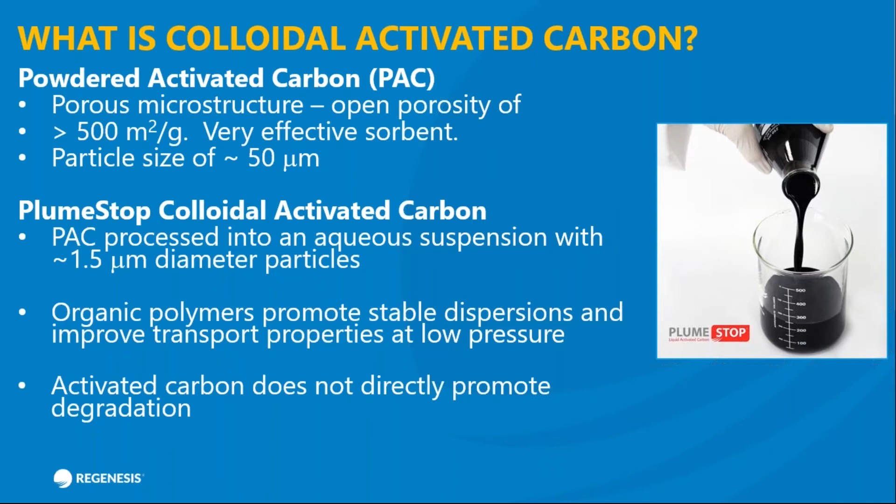So it's a great sorbent that can be placed widely in the ground, but one thing we need to realize is that activated carbon alone does not directly promote degradation.

Let's see what happens if we do a barrier in the ground with activated carbon alone. We have a model called PlumeForce, and here you can see the assumptions: seepage velocity of a couple hundred feet per year, a mixture of parents and daughters, a 7-year runtime with no degradation, no biodegradation, no abiotic degradation.

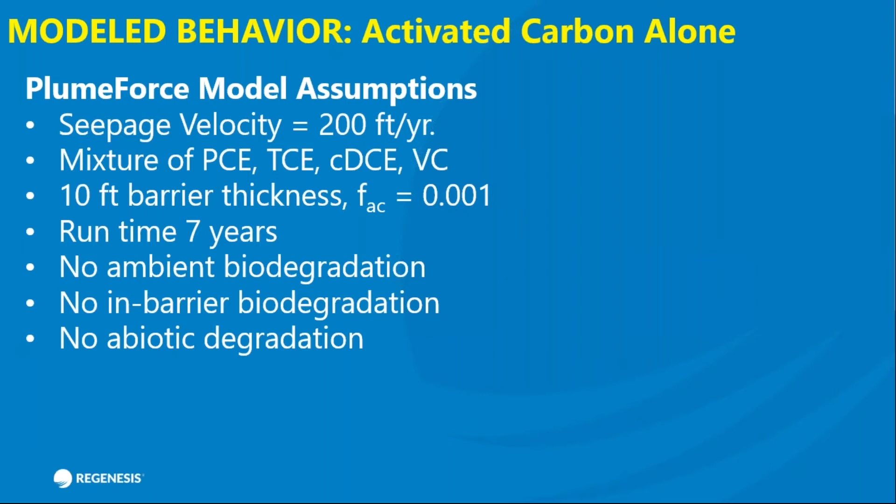Here's the plot. On the left are the incoming, or up-gradient, concentrations of the contaminants. We have about 1,000 micrograms per liter of PCE and subsequently lesser amounts of the daughters. The gray box in the middle represents our barrier. The contaminants flow with the groundwater, reach the barrier, and then emerge on the other side.

What you can see is that PCE toward the back of the barrier does get fully absorbed, and there's nothing coming out the back end, because PCE is more hydrophobic and absorbs better. So it's going to occupy all or nearly all of the activated carbon absorption sites.

But for the daughter products, there's not really enough surface area or absorption capacity on the carbon in the wall to absorb these, so they break through. The orange line is TCE, and going down you can see cis and vinyl chloride. Basically, the effluent coming out of the barrier is the same as coming in, and there are no degradation products, which in this case would be ethene or ethane.

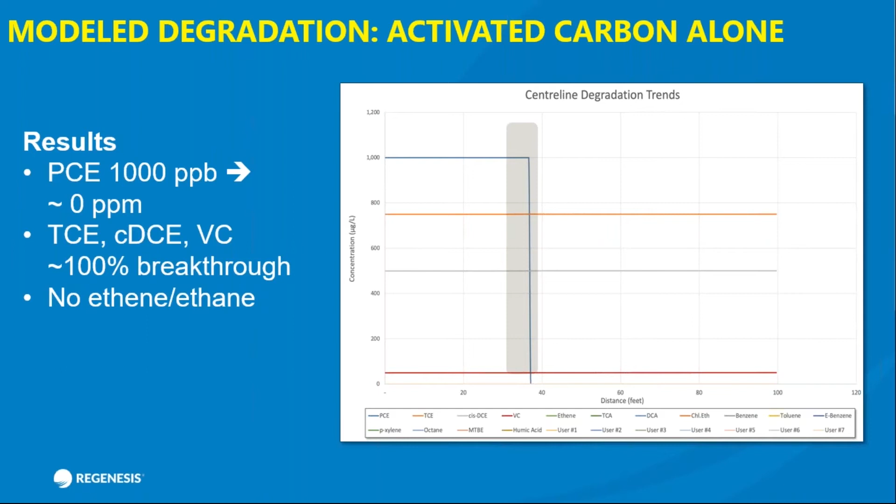So we realized that you need a combination of absorption, done by the activated carbon in PlumeStop, with a reductive degradation mechanism. There are two general classifications for accomplishing this. One is called abiotic or chemical reduction, sometimes referred to as ISCR.

There are a couple ways this can be done. One is you can use ZVI, a powerful reductant, which reacts directly with PCE and other chlorinated compounds and produces a mixture of ethene and ethane, but largely ethane. We call this direct abiotic reduction.

There are also indirect methods, which are biogeochemical. When you have native sulfate in sulfate-reducing conditions, you can form reduced iron sulfides and other reduced reactive minerals in situ that can also accomplish reduction by ISCR. Not as powerful as ZVI alone, but it does work.

The other side of the equation is biological reduction, which a lot of people are probably more familiar with. That's where you combine your contaminants, such as PCE, with molecular hydrogen produced generally by the degradation of organic compounds, nutrients, and anaerobic microbes, which could be either native or augmented, and you'll generally get the final product of ethene through daughters.

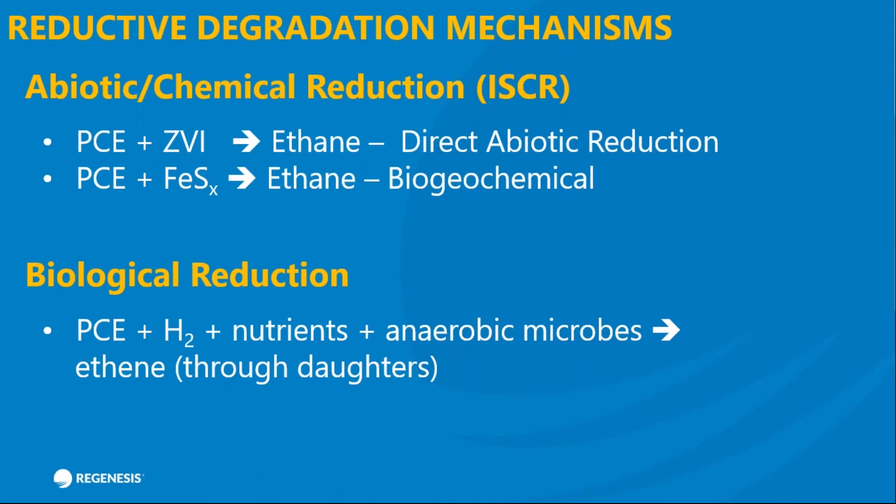So PCE will do its cascade through TCE, cis-DCE, and vinyl chloride. So what do we want to use? We have a choice of biological or abiotic degradation, and we can walk through the features of each method to give you an idea of what works best and the limitations of each.

Biological products are either water soluble, such as sodium lactate, or emulsions, such as EVO or 3-D Microemulsion, very easy to apply and you get good distribution. Basically water-like products. But one thing we need to consider is that some amendments, such as emulsified vegetable oil, can inhibit contaminant absorption onto the carbon.

There's actually a competition process between the contaminants and the vegetable oil particles, and in most cases you'll have higher concentrations of your oil. They'll preferentially absorb to your carbon, blind it, and you won't get very good performance.

The other thing about biological degradation is that it does produce daughters. So if you have a site with TCE and PCE primarily, you're almost surely going to get a cascade with the daughters. These daughters actually don't absorb as well to carbon as the fully chlorinated compounds, and it's relatively slow. In a good environment, it can happen in a time frame of months, probably would be typical.

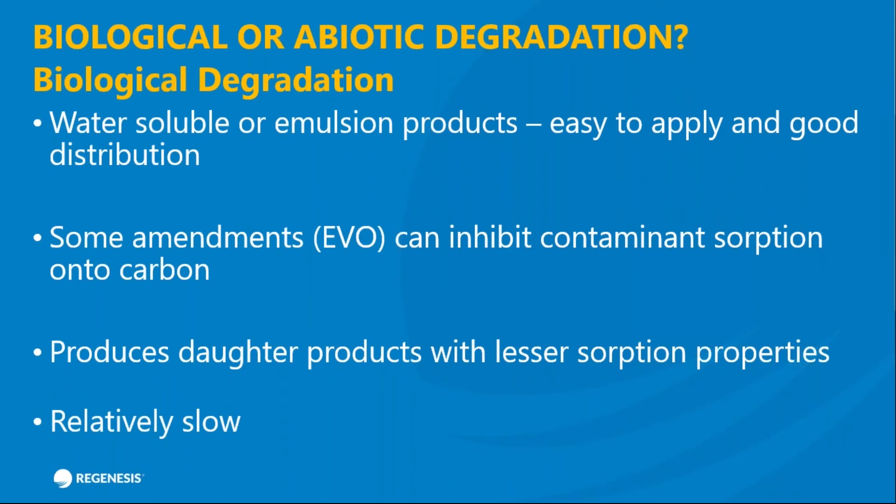Abiotic degradation with ZVI. We have a colloidal iron product here at Regenesis with a particle size about the same as colloidal carbon, so they can be applied together. Unlike the biological amendments, if you put them in the same mix tank and inject them together, generally they'll be delivered to the same place in the ground.

The thing that's really nice about ZVI is it doesn't inhibit contaminant absorption onto the carbon surfaces. You minimize daughter product formation. You don't eliminate it entirely, but typically we see 90% or so of the parents transform directly to ethene through what's called a beta elimination process. And because it's a solid phase reductant, your persistence is improved—soluble amendments such as lactate will eventually react away or be passed downstream with groundwater flow.

So let's talk about our iron product, or sulfidated iron, S-micro-ZVI. This picture on the left is an artist depiction of what these particles look like. One thing that's important to realize is that, first of all, they're small—the particle size is about 3 microns. But we engineer it. We take a particle and electrochemically deposit a reduced iron sulfide surface, FeS, which is the yellow phase on this particle, onto the surface of the core, which is iron. So it's called a core shell configuration.

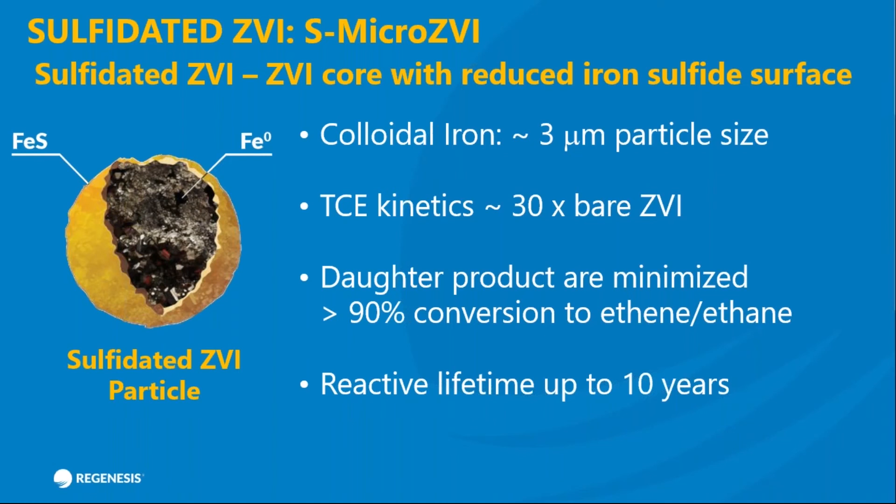There's a lot of reasons why this is better, but I'll cut to the chase. When we do tests—and it's not just us at Regenesis, this has been done at universities and other labs—you see kinetics with TCE and PCE on average probably about 30 times greater than you're going to get with bare ZVI. As is the case with other iron products, daughter products are minimized, about 90% or greater directly to ethene. And in the right environment, with the proper dosing, you can get a reactive life of many years.

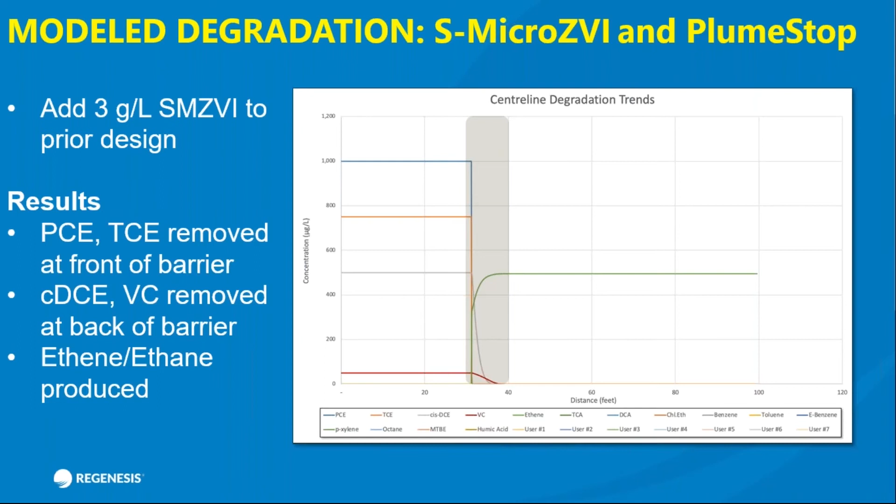So let's look at our barrier that I talked about earlier, where I showed activated carbon alone. What we've done here is, to our PlumeForce model, added 3 grams per liter per volume basis of solid SMZVI particles to the prior design, with the same flow conditions, etc. You can see the behavior is quite different. The PCE and TCE are removed at the front of the barrier, drop down to 0, and you also get removal of your daughter products. They react abiotically, and it takes a little bit longer as they pass through more of the barrier to be totally removed. By the time they reach the back, they're fully reacted or absorbed away. And unlike the other process, because we have active degradation, you can see that green line come up—we have ethene and ethane produced and generated in the down gradient part of the plume.

What I'd like to do now is actually show you some examples of where this process was used in real applications. I'm going to talk about three here. The first one is a single barrier where we had a co-injection of PlumeStop colloidal activated carbon and sulfidated colloidal zero valent iron within a barrier. On top of that—this was done a couple of years ago, so the iron technology was relatively new—we decided to be safe and add some HRC, a long release organic hydrogen produced by Regenesis, and dechlorinating microbes.

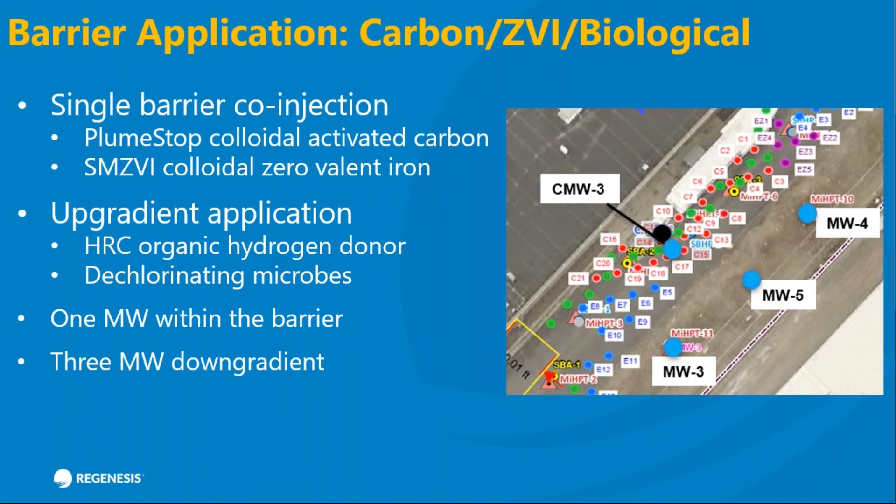These were injected slightly up gradient of the barrier that had the carbon and iron. To monitor this, we had one monitoring well within the barrier—that's the black dot there in the middle, CMW-3—and three monitoring wells 15 to 20 feet down gradient, outside the direct influence of the injection. So any effect you're going to see here is actually the effect of the contaminants being reacted away within the barrier, and you're seeing the groundwater coming through cleaner than when it went in. For your reference, the groundwater flow here is perpendicular to the barrier, from the upper left to the lower right.

So this is the response that we saw within the barrier, which is CMW-3, the black dot that was right in the middle of the injection. As you'd expect, we have direct influence here—this monitoring well had black material, which is the carbon and the iron, within the water. In the first monitoring period, we saw full elimination of all the compounds, which is not that surprising; a lot of that's probably due to adsorption. But what we like to do is look for degradation products, to look for evidence that we're actually seeing active degradation. We don't want only adsorption—we want to adsorb, then degrade, free up the surfaces of the carbon, and it's kind of a circle where you can keep the barrier working for a long time.

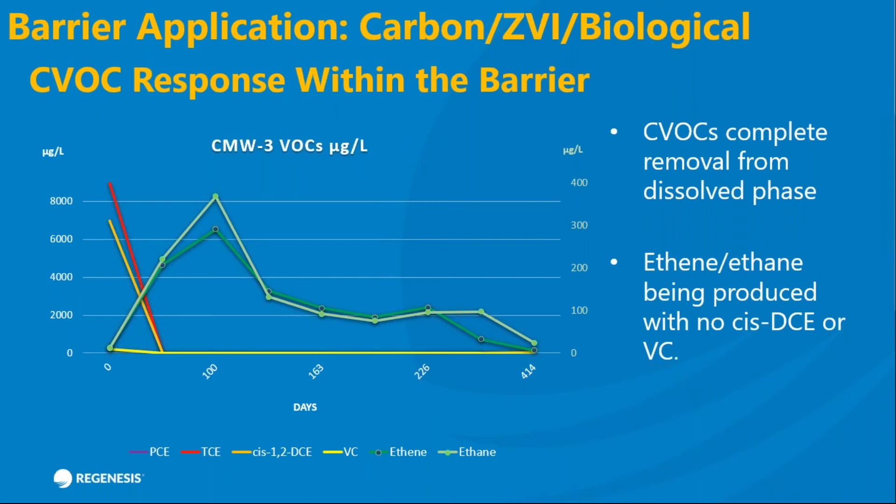The evidence that this is happening: the lighter green line is concentrations of ethane, and the darker green line is concentrations of ethene at this monitoring well. You can see this peaked about 100 days after the injection and continued on for over 400 days. This very strongly suggests that we're not just having adsorption, but active degradation within the barrier as well.

I decided to plot the downgradient barrier slightly differently. First of all, this is a log scale plot, so the concentration on the left is a log scale. What I've done here is not only plot the concentration of the contaminant at the downgradient monitoring well, but also compare it to our PlumeStop model, which assumed only biological degradation. So we plugged in how they'd behave if we only had the HRC applied and not the iron.

So we'll run through these one at a time. The red line there is TCE, and the dashed red line is the biological prediction. You can see there's pretty steady degradation after a few days. There's no TCE in the downgradient well, and the degradation process was markedly faster than what we predicted by biological behavior alone, which strongly suggests abiotic degradation, which was also verified by the presence of ethane and ethene in this well.

If you look at the daughter products, this well actually had more cis than TCE at the beginning. The orangish line on top is our cis concentration. It started off at about 1,000 micrograms per liter, and it steadily degraded down to maybe 20 micrograms per liter after 400 days. So we had 95% degradation or greater, let's say. Generally during the entire process, we had faster degradation than what was predicted by biological models. So we probably had a mixture of abiotic and biological here. Hard to say what was more prevalent.

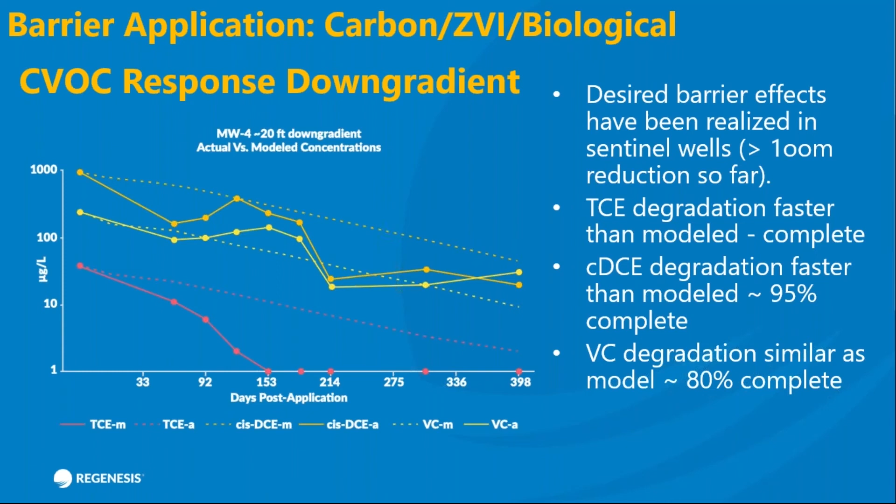And these results actually make sense. If you look at kinetics of ZVI with chlorinated compounds, TCE is considerably faster than cis, which is a little bit faster than vinyl chloride. So we're actually seeing behavior that's pretty close to what we'd expect, and we're going to continue to look at the site moving forward.

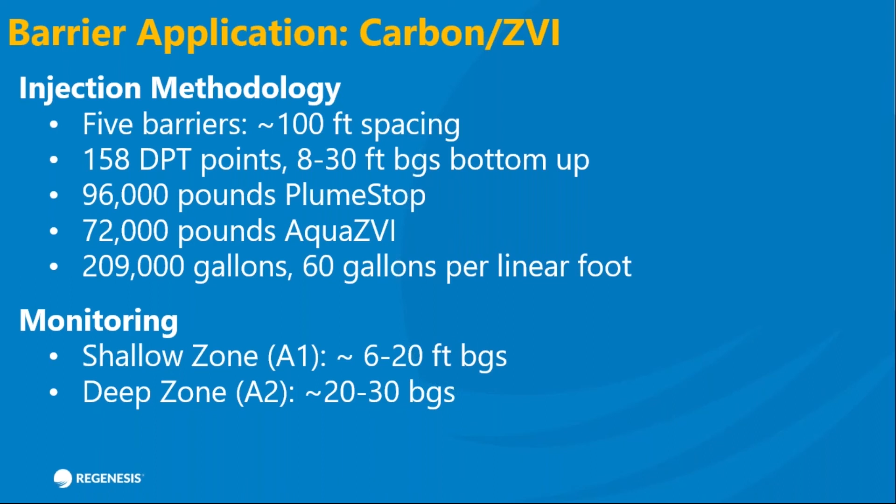The second site I'll talk about is carbon and ZVI alone. Instead of a single barrier, we actually have 5 barriers, about 100 feet apart. It's a large project: 158 DPT points from 8 to 30 feet BGS, bottom up, almost 100,000 pounds of PlumeStop, 72,000 pounds of AquaZVI, and 209,000 gallons of injectate, about 60 gallons per linear foot. Pretty substantial program. We had 2 monitoring zones, a shallow zone, which was 6 to 20 feet below ground, and the deep zone was 20 to 30 feet below ground.

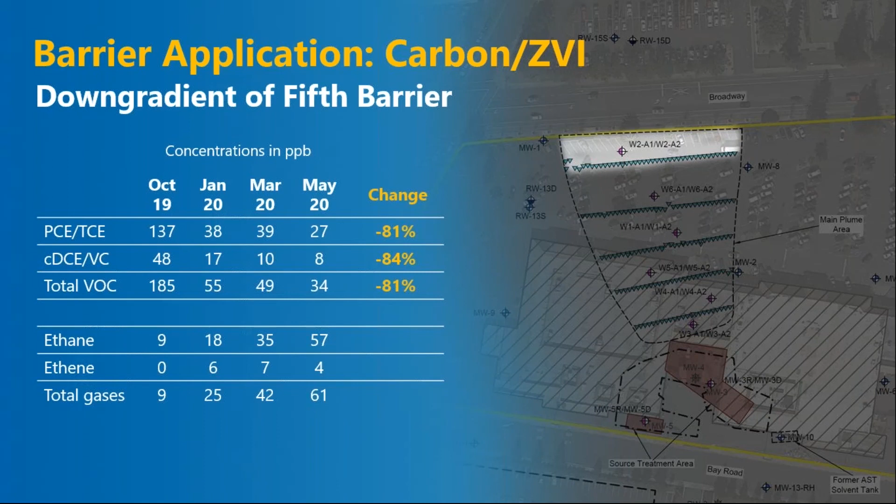And we get down to the very last barrier. We're seeing a little bit less reduction there, but it's still in the low 80s. So this is basically showing that in a barrier configuration, a combination of PlumeStop and iron is an effective combination.

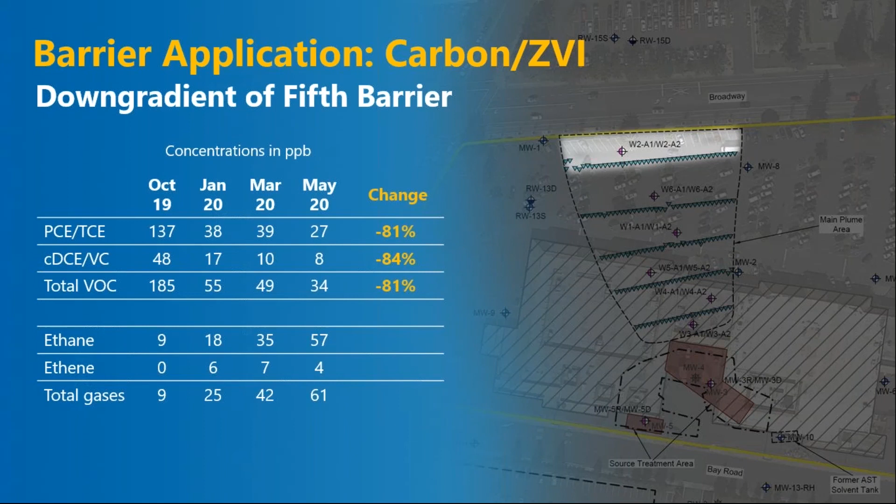So here's the summary: site-wide, 95% reduction in PCE. That slows down a little bit as we get down to the daughters. Large increases in ethene and ethane, as we expected, since the kinetics of the parents is greater than the kinetics of the daughters.

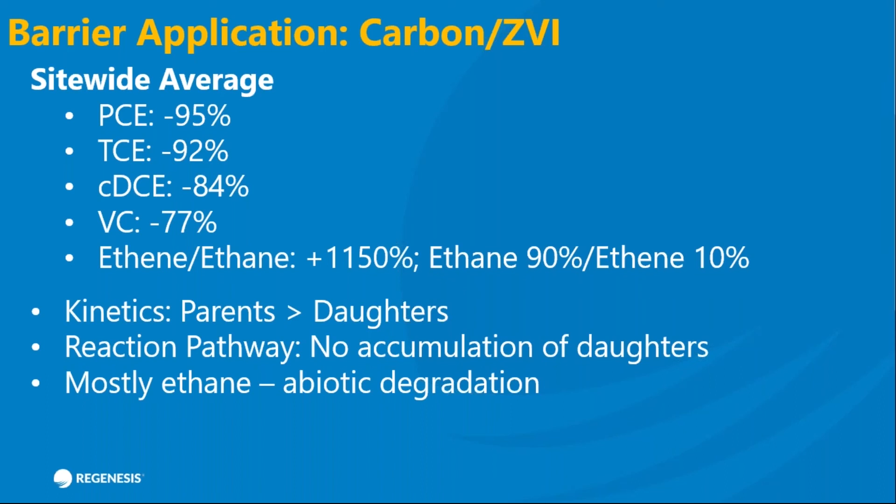That's just an iron reduction. One thing that's nice is that we're not seeing any accumulation of daughters, which is once again expected from iron. And as I said earlier, we've got mostly ethane, indicative of abiotic degradation.

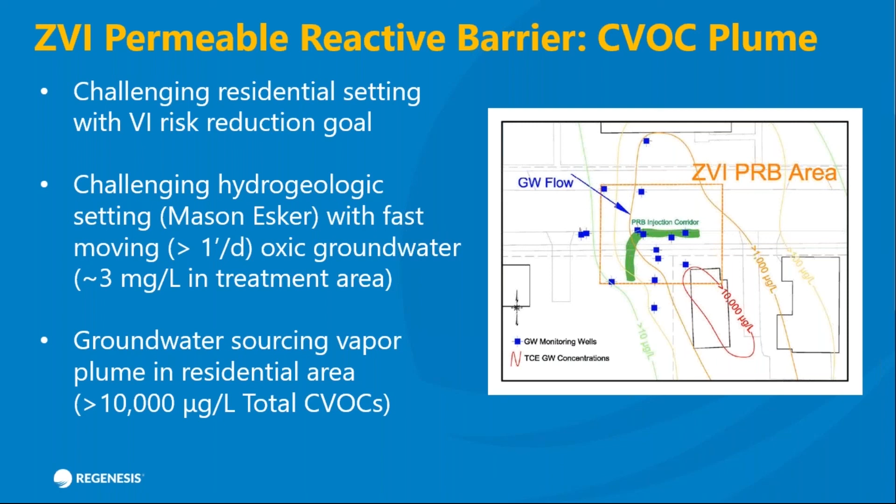And as we did in the first site, we did add a little bit of HRC upgradient on this as well, although the iron concentrations were much higher - it's the primary reduction mechanism. As with the first site, we also have a monitoring well within the barrier and one downgradient as well.

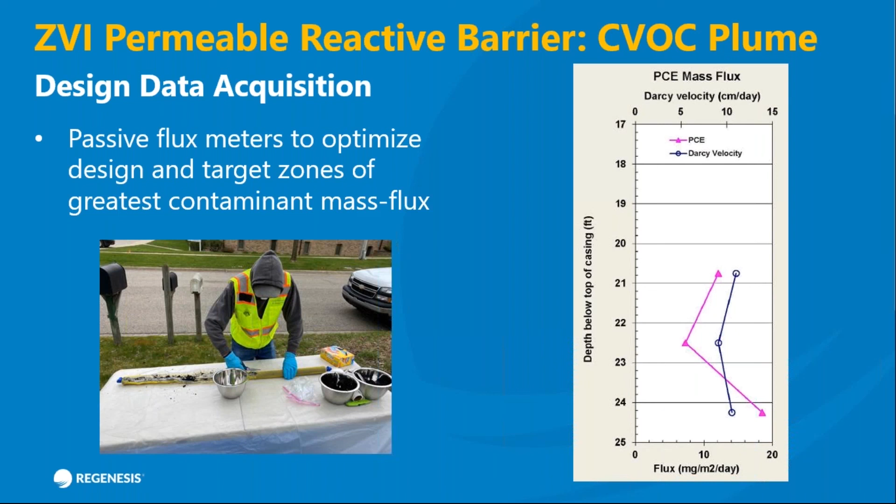So the design verification took place using the passive flux meters, and from that we were able to calculate the Darcy velocity of the groundwater and the concentration of PCE in the water. We can also calculate the flux. We use this in our design model to try to make sure that we get this right the first time.

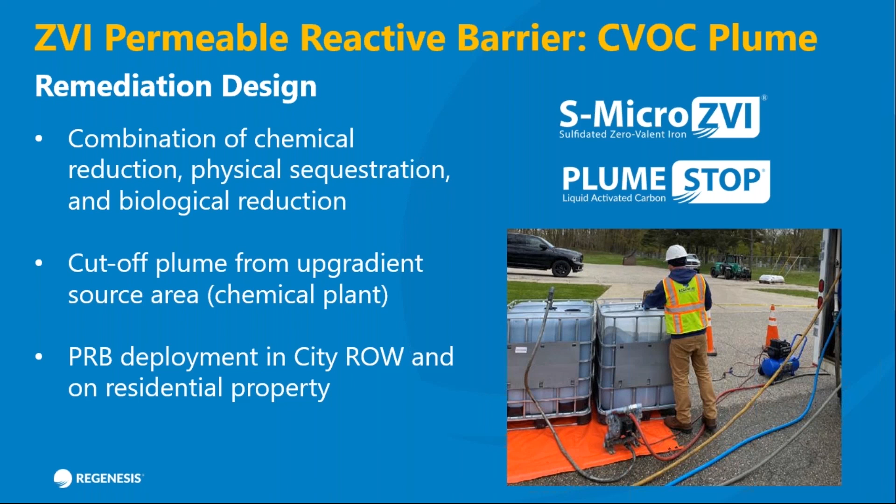So it was done by RRS. This is a site in the Midwest. Once again, we're trying to do a combination here of primarily chemical reduction, but we're certainly not afraid to let bio do its job as well. And you can see they're doing this on actually a sidewalk in the Midwest.

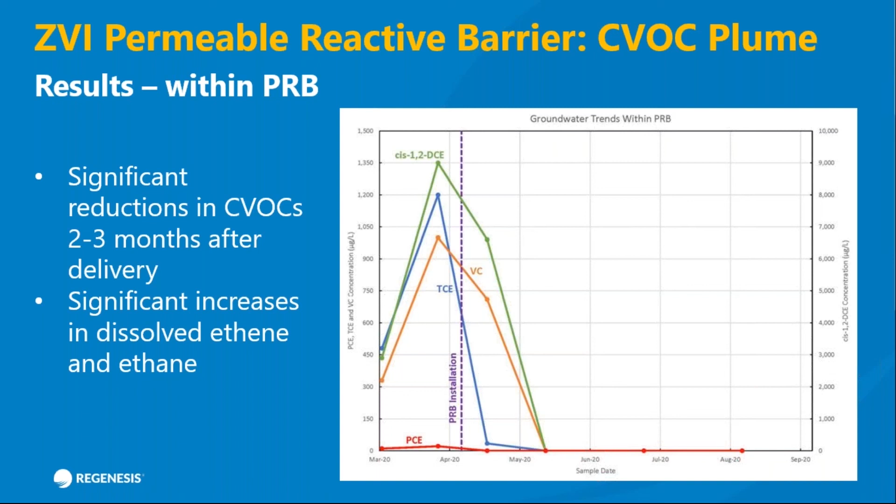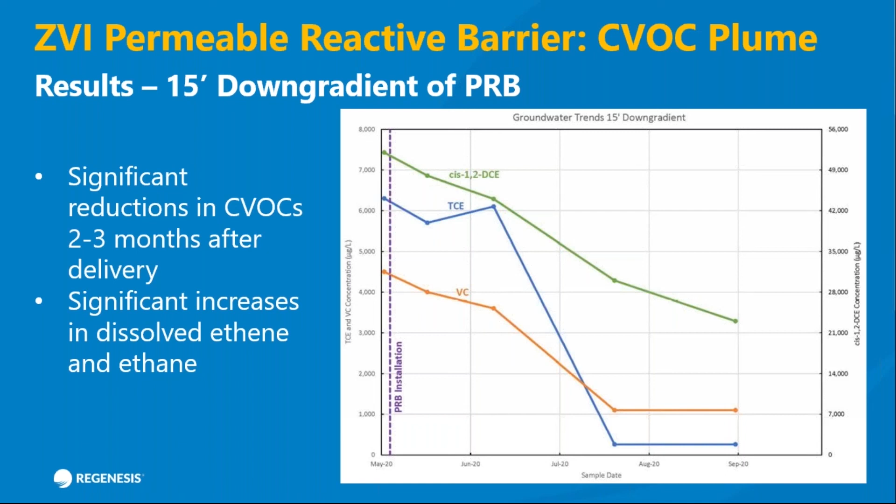So that's a really, really favorable result, and we're going to keep on monitoring this job, and hopefully we'll keep on getting good results.

So that's the summary of the technology, and some of the sites that we've applied this on - and this is just three. I'd guess that in the last 2 years, it's probably been used on dozens, maybe 30 different sites, and we're installing new remediation approaches basically several a month.

As you'd expect, colloidal carbon is a great sorbent. It works great in above ground tanks, but when we can get the particle size down, we can inject it, apply it uniformly, and get basically a near immediate 3 order of magnitude contaminant reduction within the injected barriers. You can see the downgradient effects are realized with groundwater flow - there's a delayed response there, but that's to be expected because the downgradient wells don't generally have a direct influence from your injected materials. And we've seen improved time.

Colloidal iron provides a degradation mechanism that, combined with colloidal carbon, makes the process complete and degrades contaminants with rapid kinetics. So that's it.